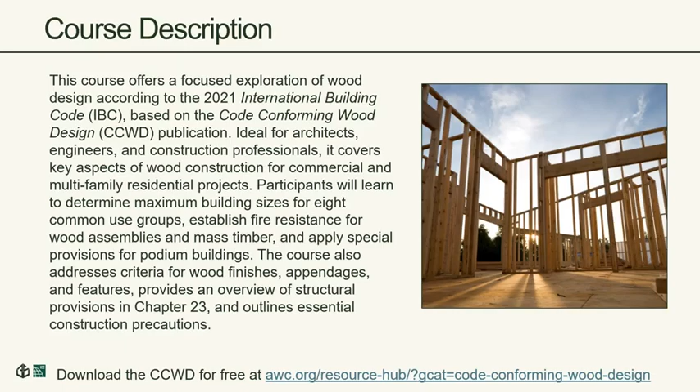Hopefully you've seen the description, and that's why you're here today. So I won't read from the slide or spend a lot of time here on this course description. You'll have that available, hopefully with the handouts that go along with this webinar. But I will spend a little bit of time talking briefly about the learning objectives for today.

We'll also talk a good bit about fire resistance and identify methods that the code establishes for determining fire resistance of wood assemblies and elements. We'll talk about some special provisions like sprinklers and compartmentalization, and then non-structural uses where we apply provisions such as those in the code for finishes and appendages.

So those are some of our learning objectives for the day. The document that we will use as a curriculum, if you will, for this webinar today is called the 2021 Code Conforming Wood Design and the IBC.

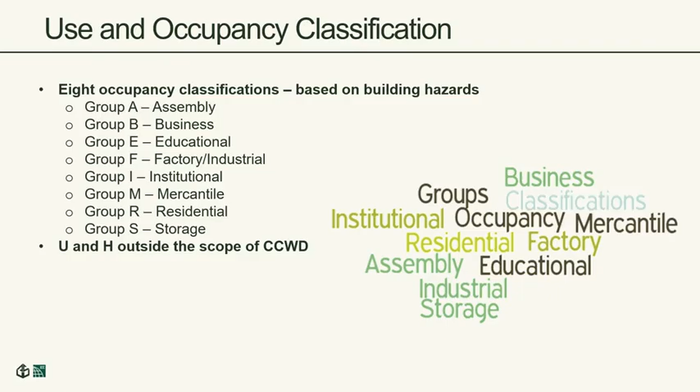And while wood is used in the occupancy classification U and H, since Group U is really for agricultural and less hazardous occupancies, and since Group H is used for much higher hazard occupancies, those are not within the scope of the Code Conforming Wood Design. So we'll be covering the 8 occupancy classifications that you see listed here, and those are the 8 that are also covered in the document known as Code Conforming Wood Design.

So within the building code, and you'll see this within the document as well, Chapter 35 is a very comprehensive listing of all referenced codes and standards. So rather than trying to put effective dates of standards throughout the text of the IBC, you'll simply see a reference to a particular standard. And then Chapter 35 will provide that reference standard along with the standards development organization, identification, the complete identification and title of the standard, and an effective date.

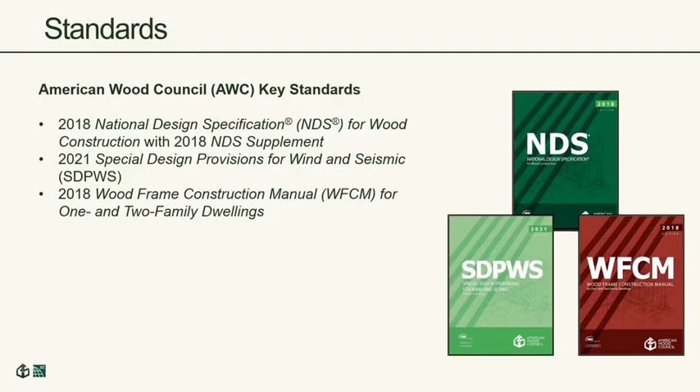And we'll see some of the other key reference standards in the code today, especially as we talk through the Chapter 23 provisions of the code. One of those is the 2021 Special Design Provisions for Wind and Seismic. Another is the 2018 Wood Frame Construction Manual for 1 and 2 family dwellings. And we'll get into a little more detail on all of those as we work our way through the program today. So our next topic is going to be types of construction.

Prior to diving into this topic, it's important for us to distinguish between a couple of code-defined terms in the IBC. One is non-combustible, the other is fire resistant. Fire resistance is defined specifically in 703.2 of the code, while non-combustible is defined in 703.3. These terms are not synonymous and not to be used interchangeably.

They're different concepts. For example, steel and concrete are classified as non-combustible materials, yet there are provisions in the code that require additional fire resistance to be added even for those non-combustible elements. On the other hand, wood is classified as a combustible material, yet it has some inherent fire resistance, and we'll talk about how we can supplement that with additional non-combustible materials to increase the fire resistance of wood used in construction.

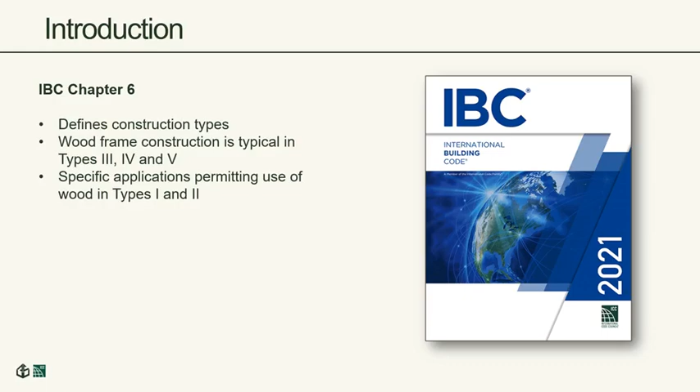Chapter 6 of the IBC defines various construction types. There are 5 different construction types listed in Roman numerals 1 through 5, with subcategories within each. Even in types 1 and 2, which are primarily considered to be built of non-combustible products, there are specific applications permitting the use of wood. We'll look at those in more detail today.

Type 5 construction permits the use of wood or any other approved material in load-bearing and non-load-bearing structural elements. This type 5 construction typically ends up being your smaller height and area buildings. So wood is obviously permitted in types 5A and 5B construction.

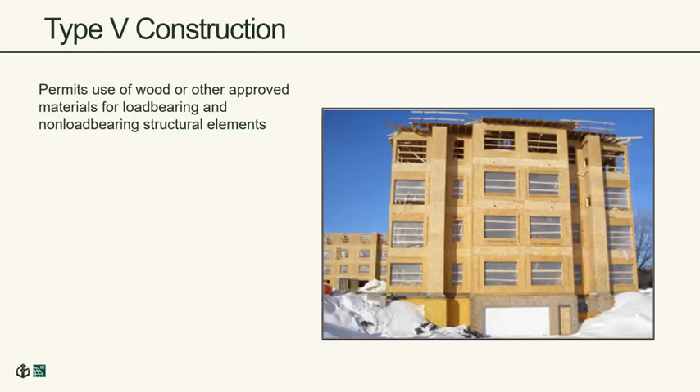We're working our way backwards here in the construction types. Type 4 construction, specifically type 4-HT, is characteristic of what's known as heavy timber construction. Prior to the 2021 codes, heavy timber was all type 4 construction. Now in the 2021 code, we've got 3 new classifications of type 4 construction. Type 4HT is our legacy heavy timber construction type, where the exterior walls are of non-combustible material or fire retardant treated wood, or protected cross-laminated timber (CLT), a relatively new wood product used in mass timber construction.

In type 4HT, the interior building elements can be made of solid or laminated wood. This is our traditional, or legacy, heavy timber type of construction, still permitted in the code, with similar heights and areas as we've always had for this type of construction.

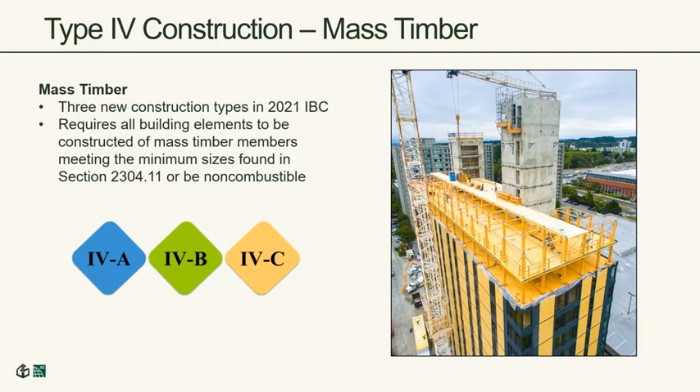Then we get to type 3 construction, which requires either non-combustible or fire retardant treated wood in our exterior bearing walls, needing a 2-hour minimum fire resistance rating. In subgroup 3A, you'll see a requirement for 1-hour fire resistance ratings for building elements other than those non-load bearing walls. In type 3B, we don't require any fire resistance rating other than the exterior bearing walls, which still need that 2-hour fire resistance rating.

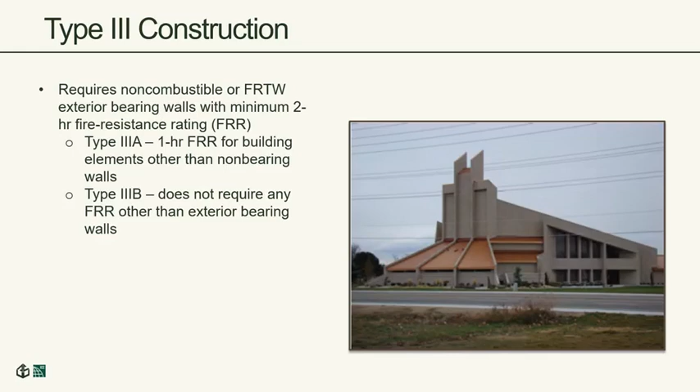Types 1 and 2 construction, as mentioned earlier, are primarily non-combustible structural load-bearing elements, but there are allowances in the code, specifically in Table 601, footnote C, where we can use or specify heavy timber or mass timber in the roof system for types 1B, 2A, and 2B, as an alternative to the 1-hour fire resistance rated non-combustible roof elements. So wood can be used literally in all 5 types of construction.

But the heights and areas will be limited for certain construction types, and we're going to look at that next and see how that applies to these wood products.

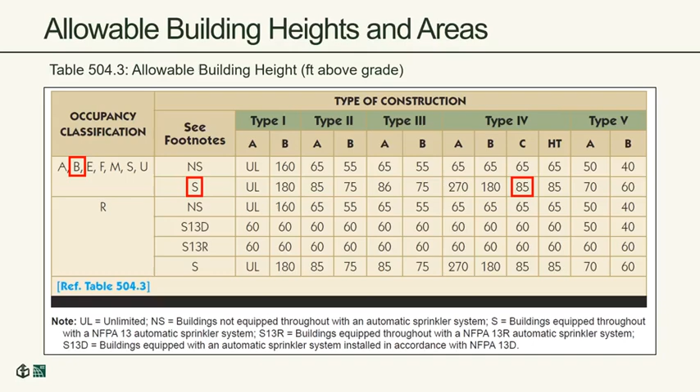Then we get to table 506.2. This is our allowable area factor, A sub T. It's a very specific term, allowable area factor, because this factor or number that we're going to get from the table ends up being used in equations that determine the maximum allowable building areas for the buildings we're talking about. So again, for an occupancy classification B, we're going to look at 2 numbers here for an example we'll do in a little bit.

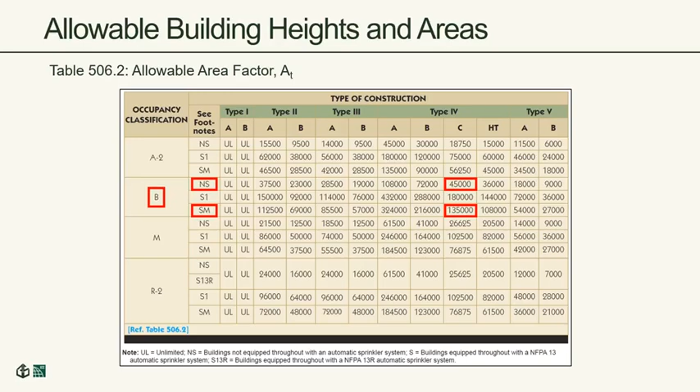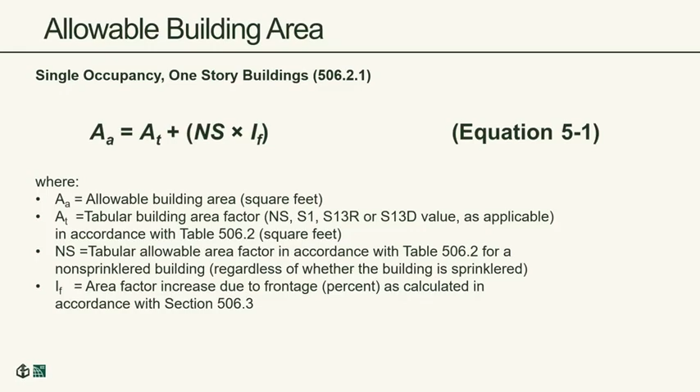That's going to show up in a couple of these equations we're going to be looking at next. The allowable building area for a single occupancy, 1-story building is calculated per equation 5-1 of the code here in chapter 5. The A sub T factor is the tabular building area factor we just looked at in the table. The NS is a non-sprinklered value. We're calculating an allowable building area, A sub A, and introducing a new factor here, I sub F, which is the area factor increase due to frontage, the amount of open perimeter around the building. We'll talk specifically about how we determine that I sub F value in a little bit.

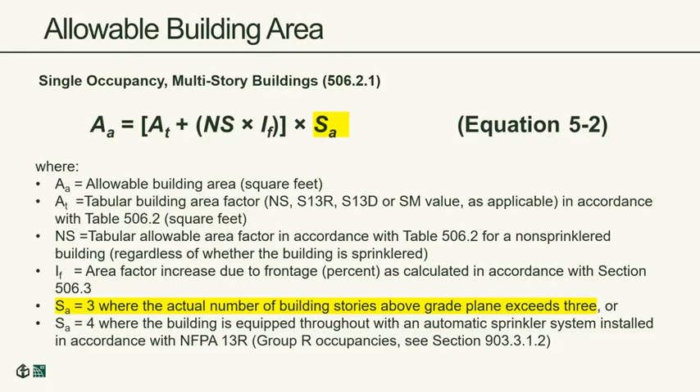For multi-story buildings, single occupancy yet multi-story, we're adding another variable, S sub A. S sub A is the actual number of building stories above grade plane, but it's capped at a maximum value of 3. The example we're going to look at is a 4-story building, but that S sub A value is going to be less than or equal to 3 for all multi-story buildings. There's one exception at the bottom, the last bullet, showing S sub A equal to 4 for certain group R occupancies. But for our purposes today and in general, most calculations will set S sub A at a maximum of 3.

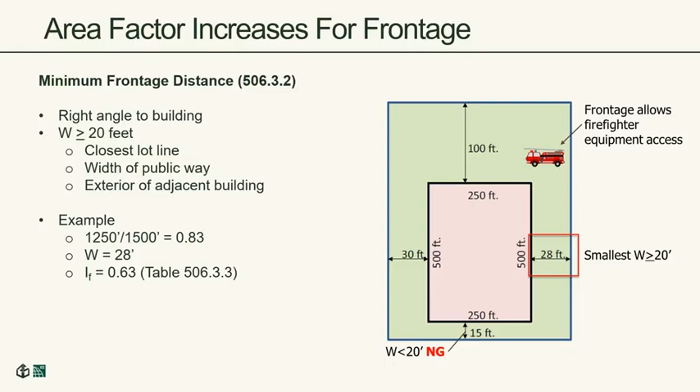You'll see in the next table why we're going to select that value of W equals 28, and we're going to come up with a factor of 0.63. So we're trying to set this up so you see the factors that we would use in this next table.

As we calculated on the last slide, we've got 83% of the sides of this building which have at least 20 feet of open perimeter or setback to the lot line. So we're going to be in this bottom row here between 75 and 100. We work our way across to that W equals 28, and that number ends up between 25 and 30. This simple table gives us an I sub F of 0.63.

Now, interpolation - there's a footnote on this table in the code that says interpolation is permitted, and some of the tables developed for the Code Conforming Wood Design document provide those interpolation values. The calculator that Ed is going to talk about later in the program also provides more exact values than what you can derive from a simple table like this.

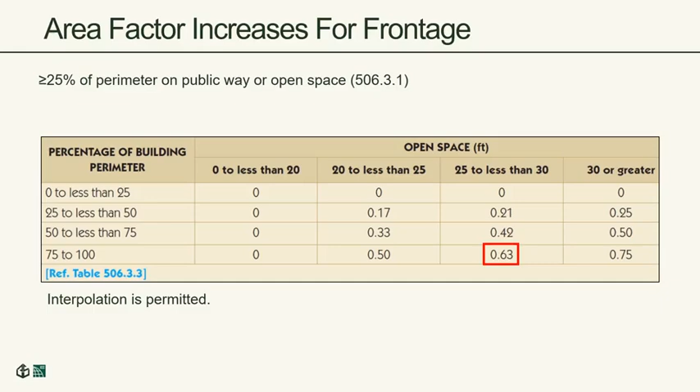So now let's go back and plug all this information into our example. We've got a SM value of 135,000, and an NS value of 45,000. We plug that into our second equation, which accounts for this frontage increase of 0.63 times NS. We end up with a total building area, now that we can account for the area increase for frontage, of 490,050 square feet.

So for the total building of 4 stories, we divide that by 4. Now our allowable area per story goes up to 122,512 square feet, and that gives us our allowable area per story.

However, if we look at our actual dimensions of the building, 250 by 500, that says our actual square footage is 125,000, which exceeds our allowable. So that's no good - NG's no good. We're about 2,500 square feet short in this particular example. We are allowed to interpolate, but even if we sharpen our pencil and interpolate, we still end up about 58 square feet short of our allowable - at 124,942, we're still short. So what can we do?

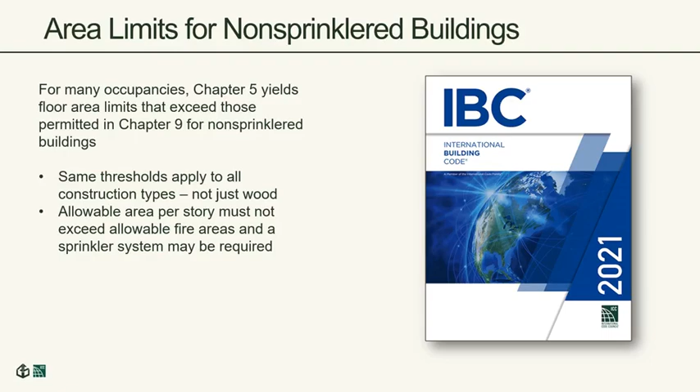In addition to larger areas, there are a lot of other trade-offs that come with adding sprinklers to a building. Yes, it will provide some additional cost, but a lot of these trade-offs may reduce costs in other areas. So it's worth exploring this option of sprinklers to see if you can get reductions in corridor ratings and opening protection, some flexibility in your means of egress, travel distances, number of exits, common path of travel, reductions in dwelling unit separations, alternates to emergency escape openings, alternates to fire and smoke damper requirements, interior finishes we'll talk about later, and others. So sprinklers not only help you in your heights and areas, but some of these other items as well that may help in your process of providing affordability to offset the sprinkler costs.

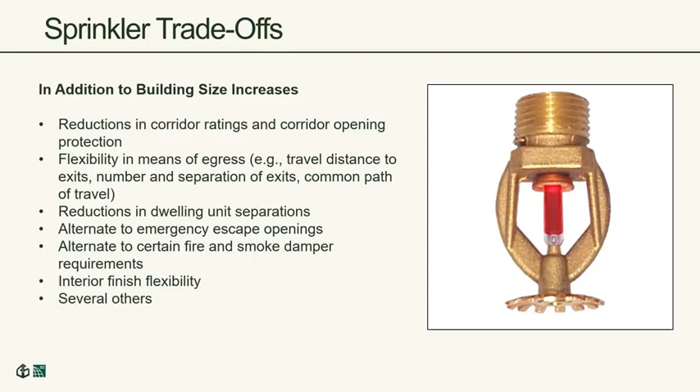Now we'll get in specifically into the code conforming wood design building area tables. So just an intro to what these tables are going to look like and what you're going to see. We'll spend a little more time on this particular slide.

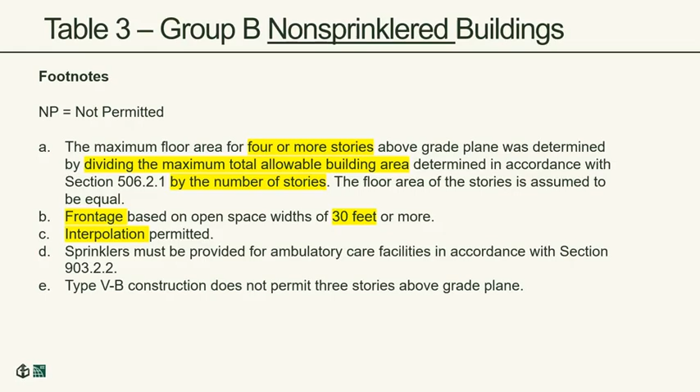So that first table, table 3, is for a non-sprinklered Group B. Then you'll see table 4, which is for sprinklered buildings, and in this case, the areas increase pretty substantially for sprinklered buildings. The number of stories, as you can see here, goes up, at least on this slide, up to 6 stories.

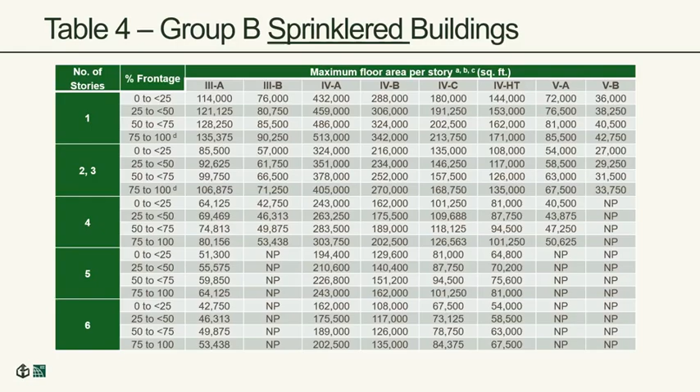But I'm going to jump to the next page, because new to the 2021 IBC, types 4A, 4B, and 4C allow us to go even beyond those 6 stories that were allowed for type 4HT. So 4A construction goes all the way up to 18 stories, 4B goes up to 12 stories, and 4C goes up to 9 stories, as we saw in some earlier slides. We've tabulated these allowable maximum floor areas per story for all these new types of construction here.

So that's a sense of the table 4 footnotes, very similar to the first 3 footnotes, and then you'll get a few footnotes very specific to Group B sprinklered buildings.

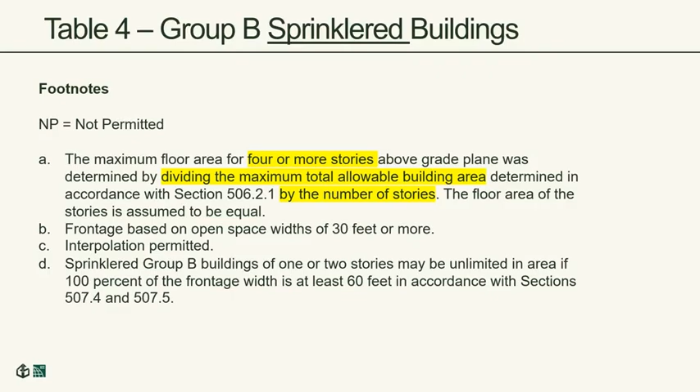Now, back to our example that we used earlier, we had a 4-story type 4C building, and because of these percentage frontage numbers here in the second column going in increments of 25%, it makes it a little bit tougher for us to compare apples to apples. But for this specific example, because we only have 2 sides of the building that exceed that 30-foot threshold that is in the footnotes we're using for these tables, that kind of limits how we can come up with a number here.

And so this number, 118,125, is still less than that 125,000 that we looked at earlier—and substantially so, again, because of some of the simplifications we've had to do for these tables. So just know there's some conservatism, some simplification as you're using these tables that may give you a starting point for your height and area analysis.

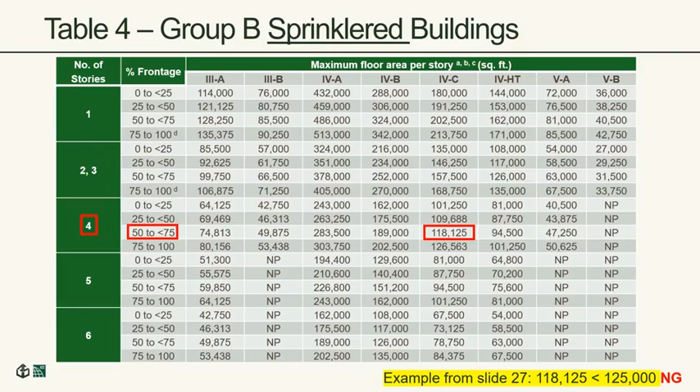And then, if you're not within or not quite where you need to be, you might need to sharpen your pencil and actually go use the equations, do some calculations, or use the calculator that Ed's going to show you here in just a little bit.

So there are also provisions in the code for unlimited area buildings, and we'll just walk briefly through some provisions in section 507 of the code for groups B, F, M, and S: 1-story buildings with NFPA 13 sprinklers and 60 feet of open perimeter around the entire building. We could have an unlimited area building.

So we go to even a group E occupancy, 1-story, fully sprinklered—as long as the classrooms have 2 means of egress, one to the outside, and we've got that 60 feet of open perimeter, we could have an unlimited area education building in type 3A or 4 construction. So we're focusing in on different types of wood construction here that could be used for these groups.

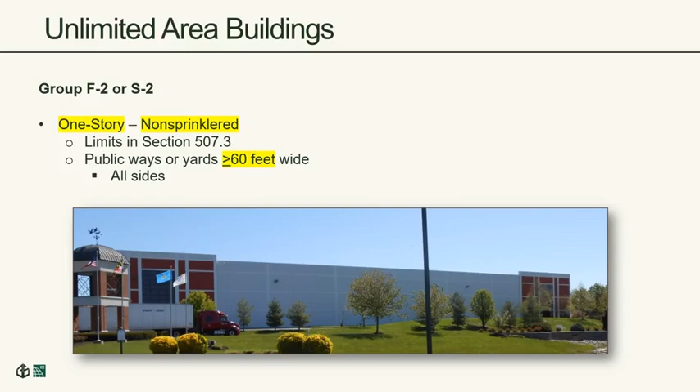Here's an interesting one: group F2 or S2, 1-story, non-sprinklered. As long as you've got at least 60 feet of open perimeter, F2 and S2 buildings have lower hazard combustibles or non-combustibles used in these groups, so even a non-sprinklered building within these parameters could be unlimited area. The difference in this slide is a 2-story B, F, M, or S, fully sprinklered, with at least 60 feet of open perimeter, can also be unlimited in area. So those are our unlimited area provisions.

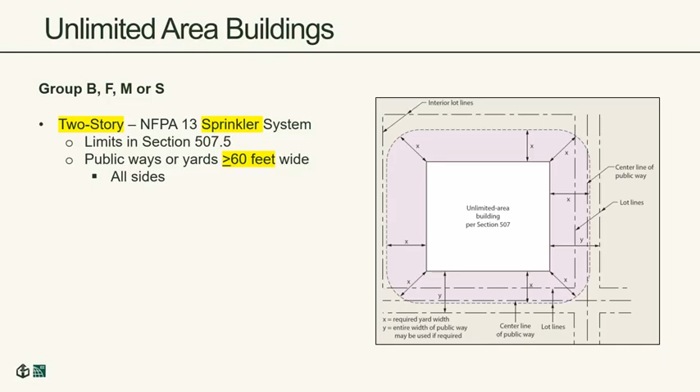Firewalls can be used to define separate buildings for allowable building size. Section 706, specifically table 706.4, provides for firewalls, and these are separate and distinct from fire barriers, fire partitions, and other types of assemblies that the code provides.

Podium buildings are pretty common all over the country. They're covered in section 510 of the code. You've also probably heard the terms pedestal building or stack building. These are buildings with a 3-hour fire resistance rated horizontal assembly between upper and lower buildings.

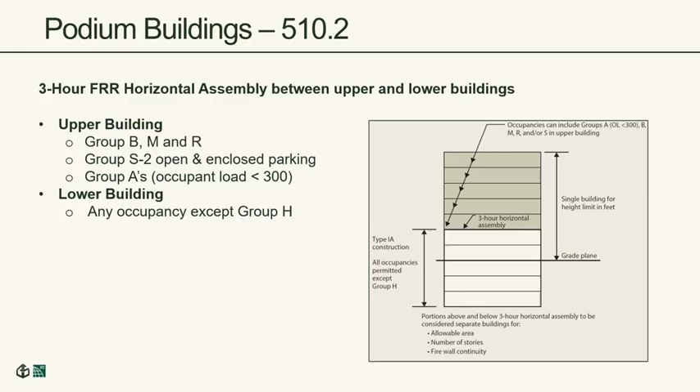The upper building can be groups B, M, R, S2 open and enclosed parking, and group A with an occupant load less than 300. The lower building can be any occupancy except group H, and that lower building will be type 1A construction. So these types of buildings are ubiquitous.

We have provisions in 510.2 of the code that talk about how we determine the building height in feet, which is measured from the grade plane. On the right side of this image, we're measuring height in feet from the grade plane, whereas we can measure number of stories from the top of the podium or pedestal, so you could get a few more additional stories into that upper occupancy group with this approach.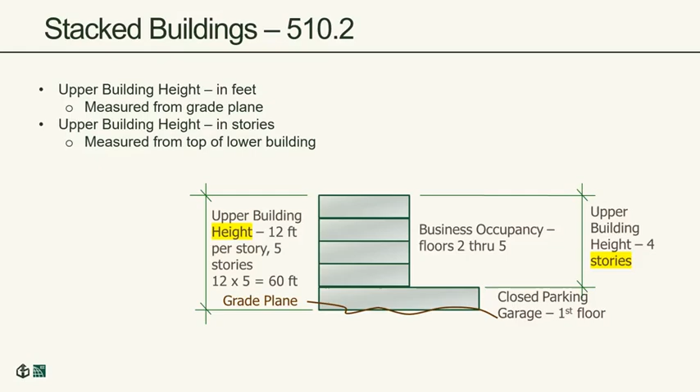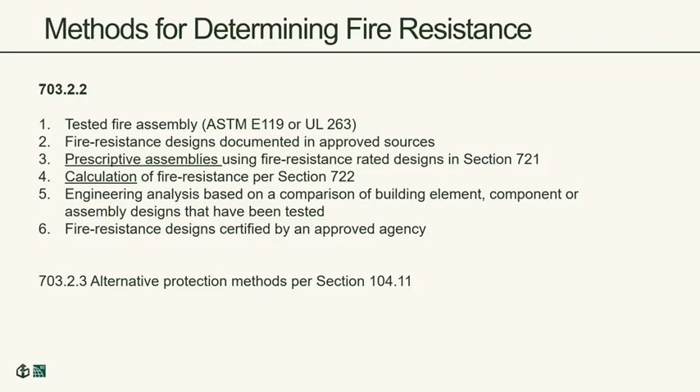In 703.2.2 of the code, there are different methods for determining fire resistance. We're going to look at two of those: prescriptive assemblies and a calculation approach. Most all of these approaches have a basis in ASTM E119 testing or the UL equivalent, UL 263. For prescriptive assemblies, there's a whole section of the code that lays out different types of assemblies, not just wood but all types, both vertical and horizontal, that if built to the exact specifications laid out in those tables, have the fire resistance rating as shown.

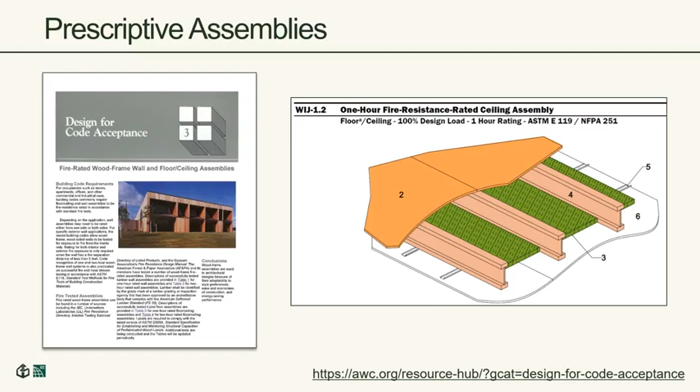For wood assemblies, AWC has a document called Design for Code Acceptance number 3 that provides the assembly ratings for both horizontal and vertical assemblies, and a lot of these have made their way into the code and match up identically with what's shown in this DCA3 document. You can see the link, and that's a free download from AWC's website as well.

The other method we mentioned is the calculated approach, and NDS Chapter 16 is referenced specifically in the code as the way to calculate fire resistance of exposed wood members. Now there's part of the approach that allows additional protection, non-combustible protection, to be additive to that calculated fire resistance rating for an exposed wood member. That's spelled out specifically in NDS Chapter 16.

We mentioned wood and non-combustible construction a couple of times in Type 1 and 2 applications, which requires non-combustible materials. Section 603 of the code has 27 specific applications where combustible materials can be used.

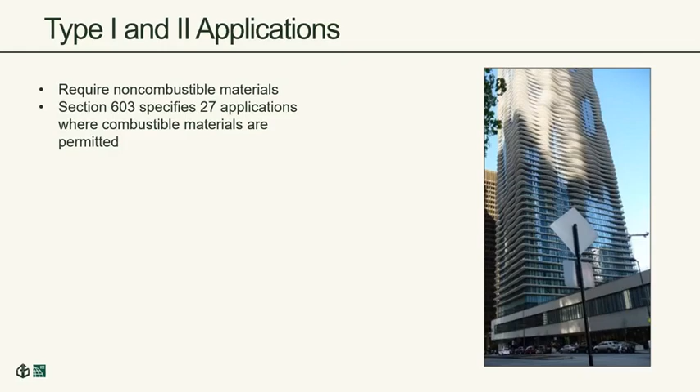One of those is fire retardant treated wood, which is still considered a combustible product. But there are a lot of areas in that list of 27 where fire retardant treated wood can be used, including non-bearing partitions, non-bearing exterior walls, roof construction, balconies, porches, decks, and exterior walls in type 3 and 4.

Heavy timber is also permitted in roof construction as an alternate to the 1-hour fire resistance rated non-combustible construction, which we talked about earlier, and that shows up in footnote C of table 601.

So building features really looks at interior finishes and some other items that we'll touch on here as we get a little closer to the end of our discussion.

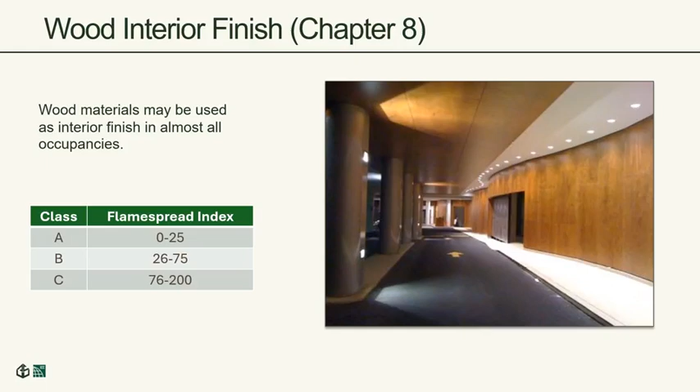Interior finish is determined or characterized by these flame spread indices: Class A materials 0 to 25, Class B between 26 and 75, Class C up to 200. And this table in Chapter 8 of the Code, 803.13, shows where those classifications are required depending on the use group and whether the building is sprinklered or non-sprinklered.

So here's another example of where sprinklers give you a benefit and would allow you to use a lower classified finish rating or flame spread rating for some of these wood materials. That's another one of the benefits that we talked about earlier.

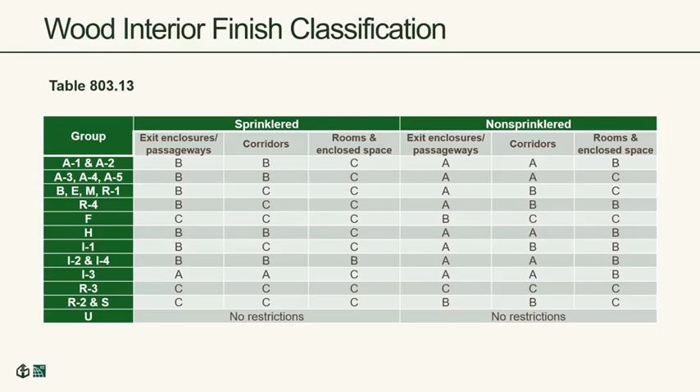Now, if you're trying to figure out what the flame spread index is for a certain wood product, AWC has a publication called Design for Code Acceptance number 1, and most wood species are going to qualify at least as Class C, some Class B. Most of your Class A products are going to have some sort of fire retardant treatment associated with them. But you can download this document, a compendium that they keep up to date with the flame spread ratings for different wood products.

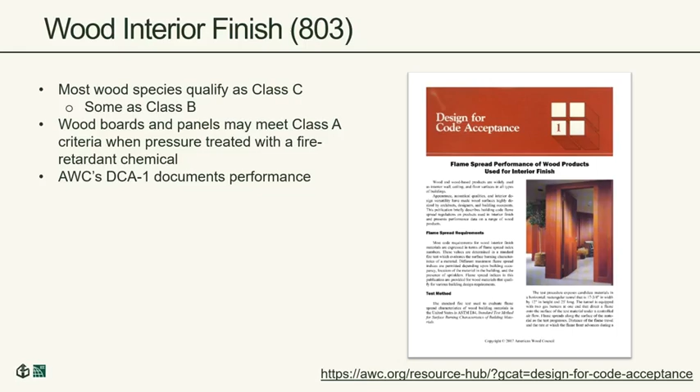Now, also in Chapter 8 are some exceptions where wood can be used. Traditional wood floor coverings, like a hardwood floor, are exempt from those finish ratings, as are mass timber elements. So any type 4 structural elements, except for exits and egress areas, are exempt from those interior finish and flame spread requirements. Those exemptions exist for all type 4 construction.

When we start talking about cornices, eaves, overhangs, exterior balconies, and other types of projections, the code is going to have some limits on distances of those projections to the lot line. 2 feet is pretty much the minimum, and once you get up to or exceed 5 feet, then a lot of those restrictions go away. So there's a table in the code, and this kind of summarizes graphically what some of those limitations are going to be for wood projections.

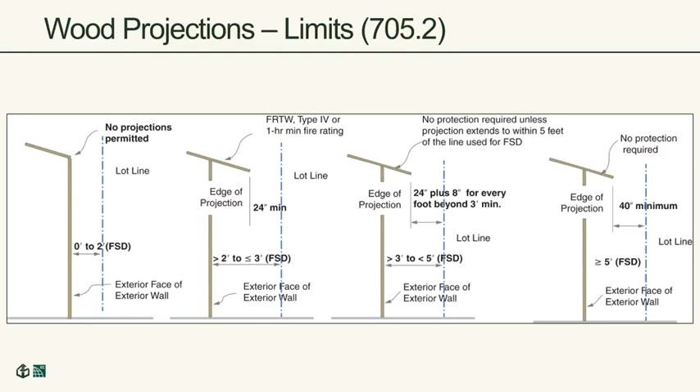We've also got definitions in the code for what are called naturally durable wood species. You see that definition here for heartwood of redwood, cedar, black locust, black walnut, that can be used in certain locations subject to decay.

If you're not specifying one of those naturally durable species, then some sort of preservative treated, waterborne preservative would be needed.

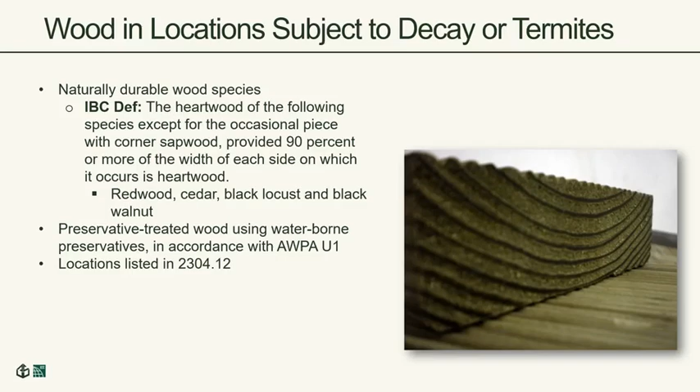All right, now we're into Chapter 23, some of our structural provisions. Chapter 23 is going to list minimum standards for quality and design considerations, general construction requirements, conventional light frame construction. There are 5 different compliance paths.

You'll see allowable stress design (ASD), load and resistance factor design (LRFD), conventional light frame construction in section 2308 of the code, the wood frame construction manual specifically referenced in section 2309 of the code, and there's an ICC standard 400 for log structures.

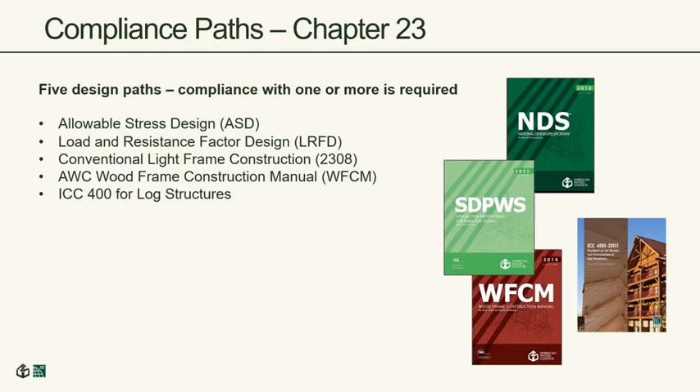So this list in 2303 is really sort of a summary of the various subsections for the different wood products and a code path for those wood products and their connections. Most of these are going to reference some sort of manufacturing or design standard, and that's a code path that's pretty important for all of these wood products that you'd specify.

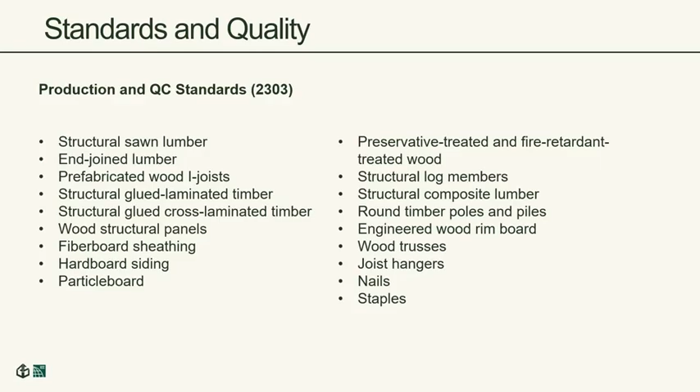Also in Chapter 23 is a description of where performance versus prescriptive requirements apply. You'll see an overview in section 2304 that will give you a path for the conventional light frame construction provisions in section 2308. Outside of those prescriptive limits, design or engineering would be required.

Here's a table dealing with exterior wall sheathing in 2304.6 and different wood structural panel products. If they have a certain panel nail spacing, you see the different wind speeds and exposure categories. These wind pressures are going to be based on your component and cladding wind loads, or wind pressures, per ASCE 7. So an example here of where these products can be used prescriptively in the code.

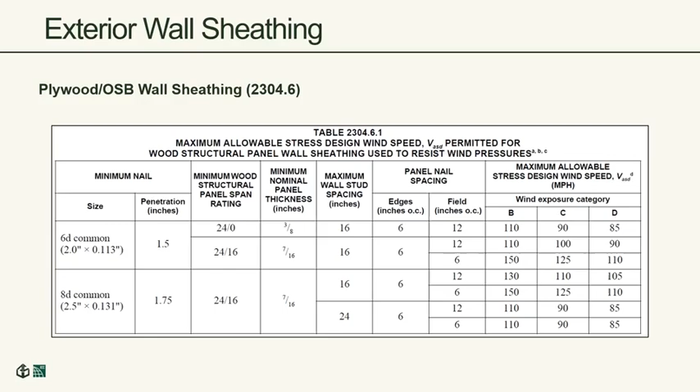Lumber decking, up until the 2018 code, prescriptively required 20 penny common nails to fasten lumber decking. With newer power-driven fasteners available in the market and the resurgence of nail laminated timber now used in mass timber construction, this table was added to allow for smaller diameter fasteners than the 20D commons you see.

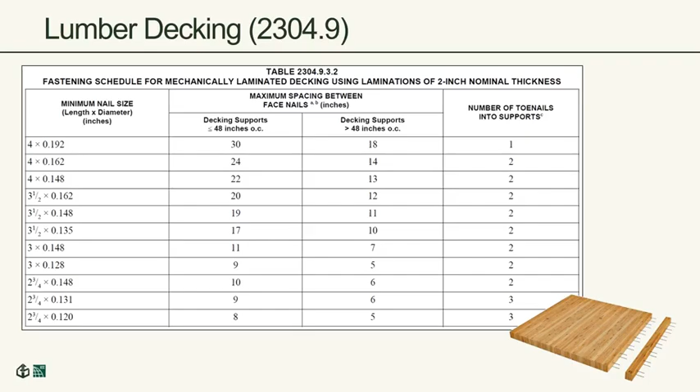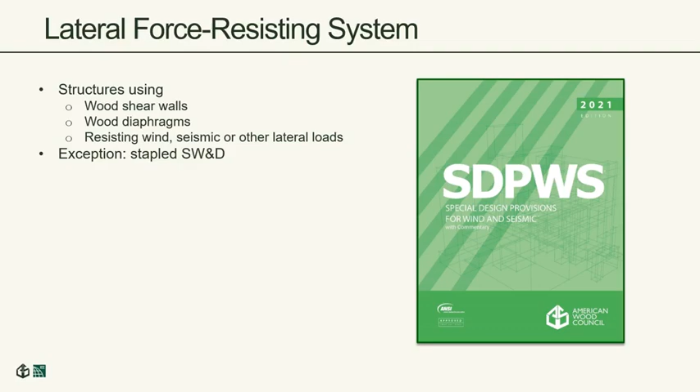For lateral force resisting systems, we're going to reference the wind and seismic standard, special design provisions for wind and seismic for shear walls, diaphragms. The stapled shear walls and diaphragms actually are still contained in the IBC, so you'd go to the IBC for that type of information. For allowable stress design and load and resistance factor design, the NDS and the wind and seismic standard are dual format standards, so you're going to get both allowable stress design and LRFD in these two reference standards.

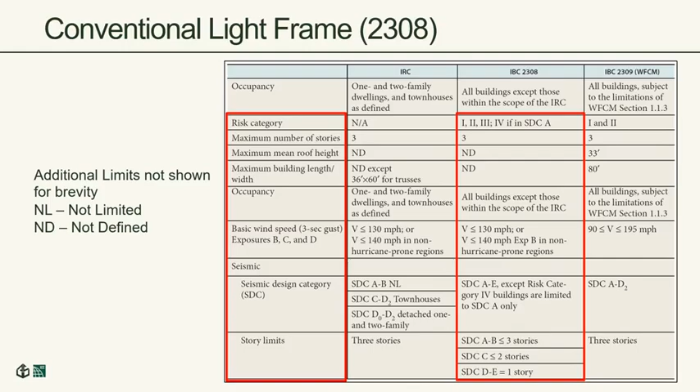When we get to 2308, this is our conventional light frame construction provisions. This table gives you a comparison of IRC, or International Residential Code, versus IBC 2308 conventional construction provisions and 2309, which references the wood frame construction manual. This might give you a better sense of the limitations and the application for these specific codes and standards, so won't spend a lot of time going through those here. Hopefully you've got these handouts that you can take a look at to help you determine where your building might fall within one of these three categories, or what options you might have available, for example with the wood frame construction manual that you may not have realized existed. The wood frame construction manual can be used for non-IRC buildings, for risk category 1 and 2 buildings only, and it's typically going to be a single story application, but for some common commercial retail buildings like restaurants and office buildings, you can determine your lateral design for wind and seismic, your gravity load path, using this wood frame construction manual.

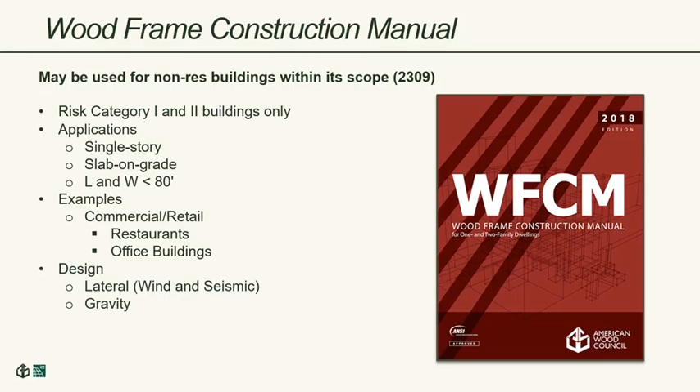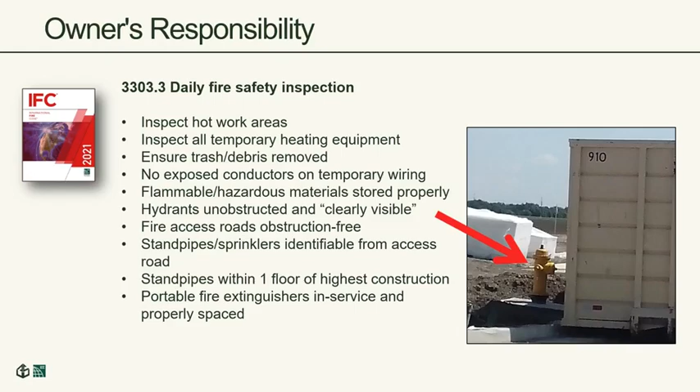One of the things you'll see, and this applies beyond wood construction, but anytime combustibles are on the job site, the fire code in chapter 33 is going to require a daily fire safety inspection. That's looking at hot work areas, temporary heating equipment, debris and trash removal, temporary wiring, flammable and hazardous materials. The example shown here on the slide is making sure the fire hydrants are unobstructed and clearly visible. There's a whole checklist of items that are going to be required for this daily fire safety inspection. I think we're getting close to the end here. We're going to talk a little bit about energy and acoustical and then turn it over to Ed.

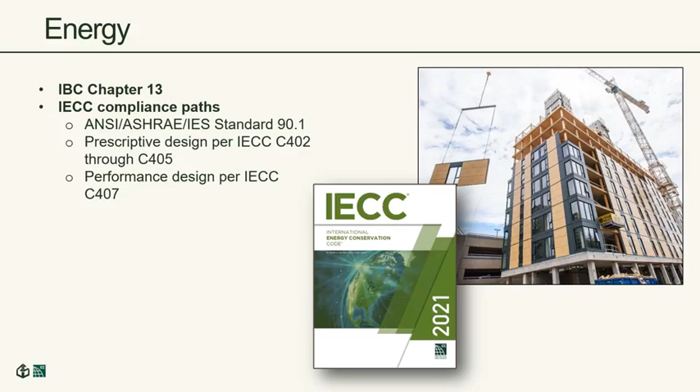Chapter 13 of the building code requires, or provides, several different compliance paths for your energy design. One's the ASHRAE 90.1 standard. Another is the prescriptive design provisions for commercial buildings. The other is performance design. All of these are per the International Energy Conservation Code. The advantage that mass timber and log structures have in this process is that those can be designed as mass elements, which gives you an advantage with your U-factor approach in energy calculations. Then for acoustics, we're looking at chapter 12. STC ratings and IIC ratings are spelled out there, especially for multifamily buildings or student housing, dormitories, that type of thing.

In DCA 3, which we talked about earlier, a compendium of fire resistance rated assemblies, there are also STC and IIC ratings for those assemblies if those have been tested and are available. AWC has also developed Technical Report 15 for calculation of sound transmission parameters for wood frame assemblies, along with an accompanying calculator. All of these are free documents that can be downloaded from the AWC website.

So I'm going to end there and turn it over to Ed, and he's going to walk you through the heights and areas calculator that's been jointly developed by AWC and ICC.

My name's Ed Lisinski, and I'm the Midwest Regional Manager for the American Wood Council. To wrap us up today, I will present a virtual tour of the newly updated height and area calculator that you can find on our website.

The calculator was just updated for the 2021 IBC in correlation with the 2021 Code Conforming Wood Design Guide that Buddy just covered. So we'll start on the website here, which is awc.org.

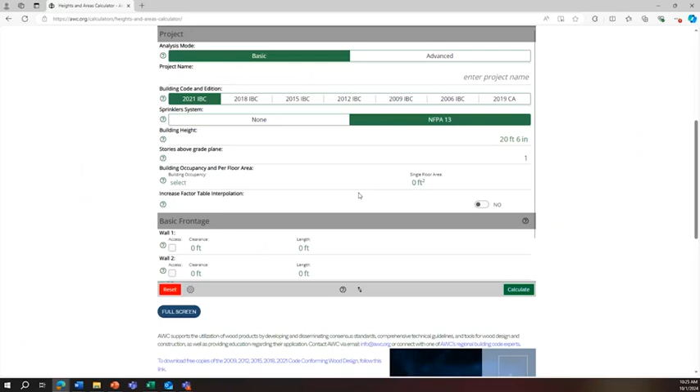Just to give you a brief overview, you'll see some basic information here that you'll type in about your project itself - you'll type in the frontage and the wall sizes. You can reset and clear everything out, and you can hit calculate once you're ready.

There is a question mark here that will provide you some information about the calculator itself. As you scroll down towards the bottom, there's some information on the 2021 Code Conforming Wood Design Guide that Buddy just covered. You can also go into full screen mode, and I will do that right now just to show you what that looks like.

So here is the calculator in full screen mode, a little bit easier to see, and you don't have to scroll as much. As you go through the side here, you'll see a whole bunch of question marks. Anytime that you see one of these, if you click on them, it will give you some information.

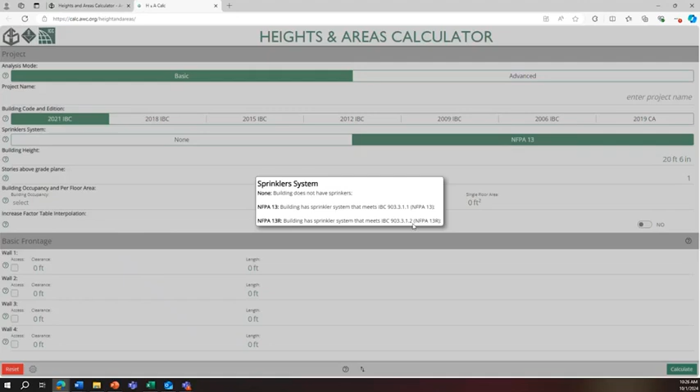Let me click on the sprinkler system one just to show you what that looks like. A little text box will pop up. If you select none, you will see the building does not have any sprinklers. NFPA 13 meets IBC 903.3.1.1, NFPA 13R meets 903.3.1.2, and so on. You can click on that question mark again and get rid of that text box.

You may just, as I clicked on that, say, yeah, NFPA 13R showed up in the question mark, but I don't see it here as an option. Well, I'll get into that in just a second as to how that option shows up. So starting off at the top of the calculator here, we have the basic program, and then we have an advanced program.

I'm going to walk through the basic program for you, but then I'll also show you some of the stuff in the advanced, though I won't actually work a problem through the advanced option. You can type in your project name if you're interested.

We'll call this one Lisinski Towers, named after myself. You can select the building code version you're on of the IBC, and you'll notice that we have it from the 2021 IBC down to the 2006 IBC.

We also have the 2019 California Building Code as an option. For sprinkler systems, like we talked about, you have none, you have NFPA 13 right now, and you can also get 13R on there as well.

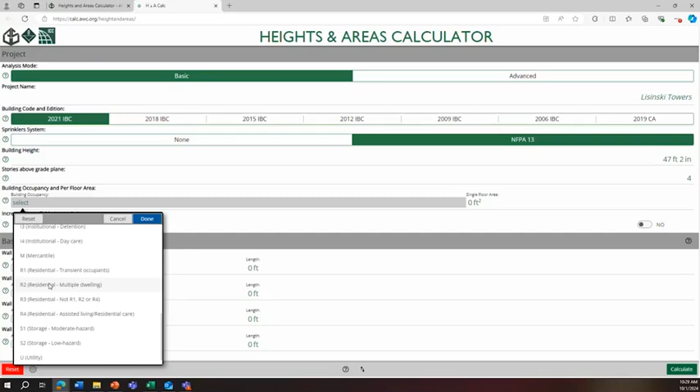The example that Buddy went through was a B occupancy, but let me just click on R2 to show you that when I select that as an occupancy type, you'll notice now up above here that NFPA 13R does pop up as an option for you.

If I click on R3 occupancy, now NFPA 13D also shows up as an option for you. But again, we want to go with a business occupancy, and it is sprinklered.

The floor area that we went through on that example was 125,000 square feet, and I just typed that in on my keyboard.

You'll notice the next question is whether or not you want to permit interpolation for the increase factor in the increase factor table. If you click on that question mark - and I know Buddy went over this a little bit - footnote A does permit interpolation. However, certain jurisdictions may not permit this.

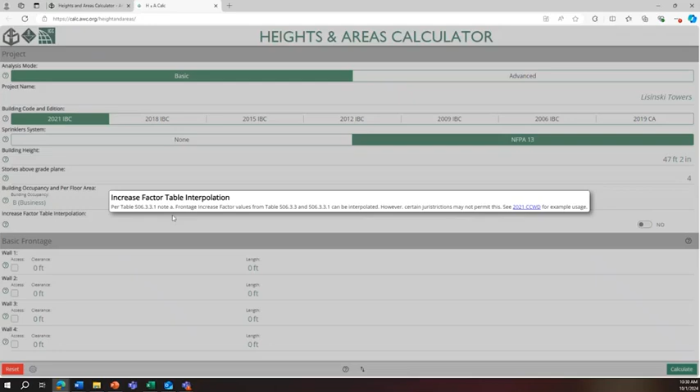I know that there are some jurisdictions, some states out there, who have adopted the 21 code and have actually taken out that interpolation button. So we've given you an easy toggle here to turn that on or off if you want to interpolate or not. We'll just leave it off for now because that's how Buddy went through his example.

So let me slide that back out of the way. In the basic option, you're just permitted the 4 walls - this is for basic buildings, again, 1 occupancy throughout the entire building. But we'll start to type in that information.

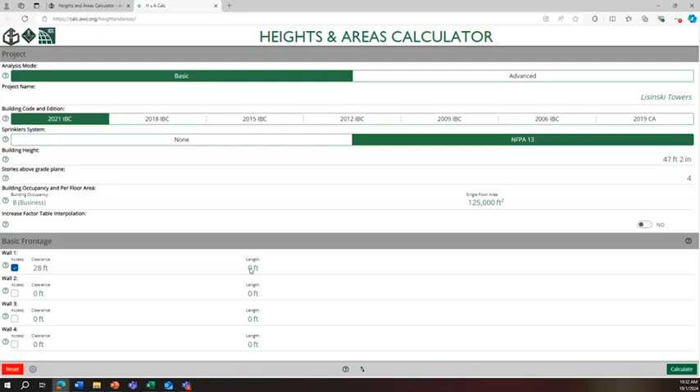So again, we have access, a clearance of 28 feet, and I'm just typing this in on my keyboard, but you can certainly do it on the screen as well. The length of that wall was 500 feet. Wall number 2 in the back had a clearance of 100 feet, and that building length was 250 feet.

Wall 3 had a clearance of 30 feet and a length of 500 feet. Wall 4 did not have access - it had a clearance of 15 feet and again a length of 250 feet.

So again, once you get through with this, you can hit reset and it's going to wipe everything out, or you can hit calculate. Hopefully you're going to hit calculate.

The top of this calculator is going to give you all the information that you typed in. So again, we're in basic analysis mode. You've got the project name, the code that you're in, the sprinklers, your building height, your number of stories, your occupancy, your floor area, and each of those different frontages.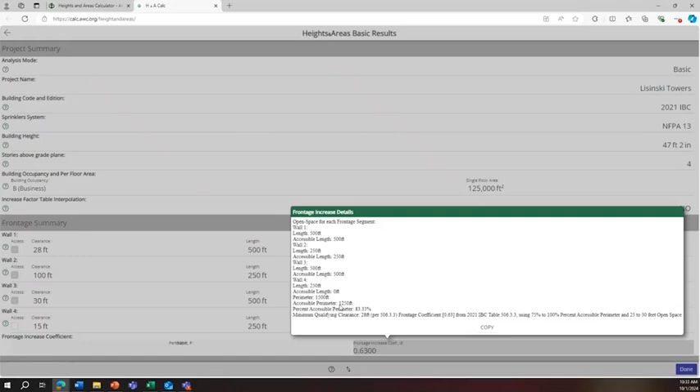Now down here, it's going to give you that frontage increase that you'll see down here. One other cool thing about this, if you click on that button, or if you click on that 0.63, it's going to give you how it came up with that information, the calculations on how that was all determined. So all that information is provided in there. Click on it again, and that text box goes away.

I'll come over here to Buddy's slide again, and you'll notice that he came up with an increase factor of 0.63 as well. And so that's what we have.

Now, if you scroll down here towards the bottom, it's going to give you your construction types that you can build with and meet each of these, meet that building size and height. So you'll see what options we have here is type 1A construction, 1B, 4A, and 4B. Now, Buddy was trying to get to 4C construction, and much like in his example, that was not permitted.

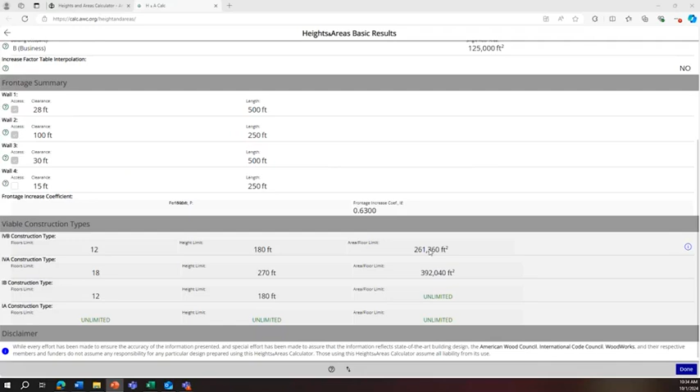I'll also mention here under the area/floor limit, if you click on that, again, it gives you the calculations and how that number was derived based off the calculations in the code. So this did not make it for type 4C.

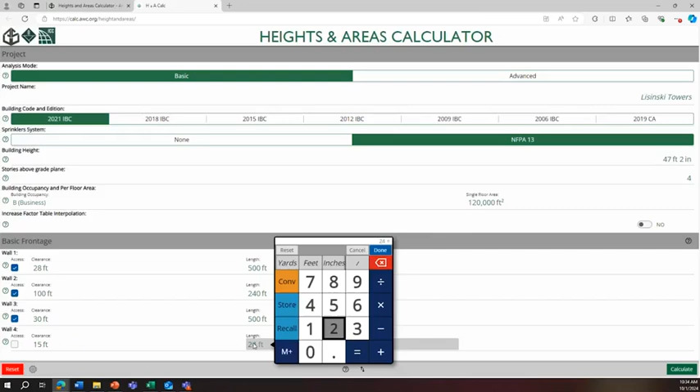You can actually hit the done button here, and it's going to take you right back to those same inputs that you had earlier. So now if we wanted to try to change this to 120,000 square feet and shrink these sides down to 240 and 240, we can recalculate that.

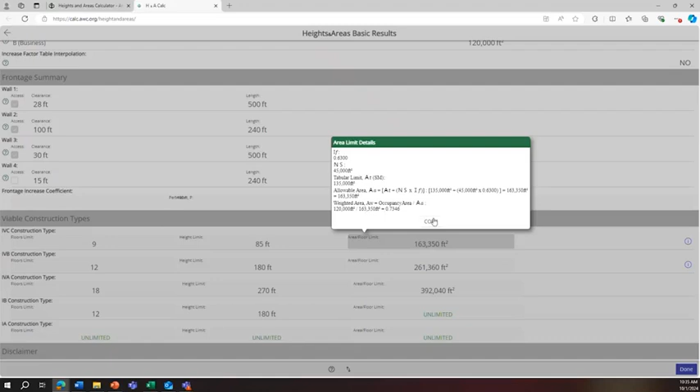And if we scroll down now, we see that 4C construction is permitted, and that weighted occupancy of 120,000 square feet per floor is about 73% of the 163,000 square feet that would be permitted, with that frontage increase and everything else added in. So if we shrink that down a little bit, we can get to a 4C construction.

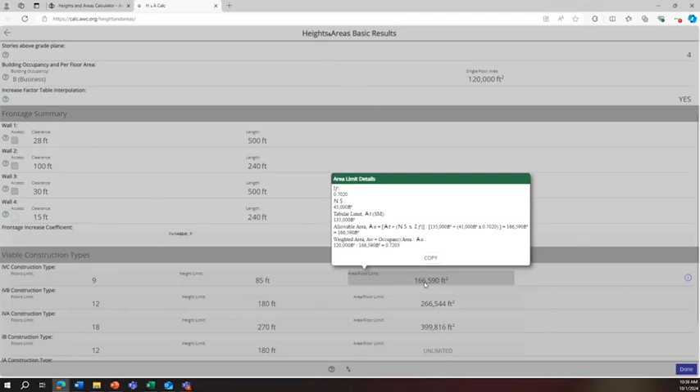I'll also let's see what happens if we allow interpolation. Let me just hit that calculate button again. And now you'll see that the frontage increase actually goes up to 0.7020. Again, if you click on that, it's going to give you all the math on how that number was derived. And now you'll see that the 4C construction actually went up to 166,590 square feet. So a little bit more on that frontage increase.

All right, let me back out of this. And just briefly, I want to show you the advanced option as well. So if I click on advanced, it's going to wipe out everything from basic. If you go back over there, it is still there though. So you can kind of do these simultaneously.

But in the advanced, again, you've got something similar here where you can do the code option up here at the top. It then lets you select the type of construction that you have. So again, we want to do this as a 4C. Sprinklers are in there again. Our height and stories translated over from that previous one.

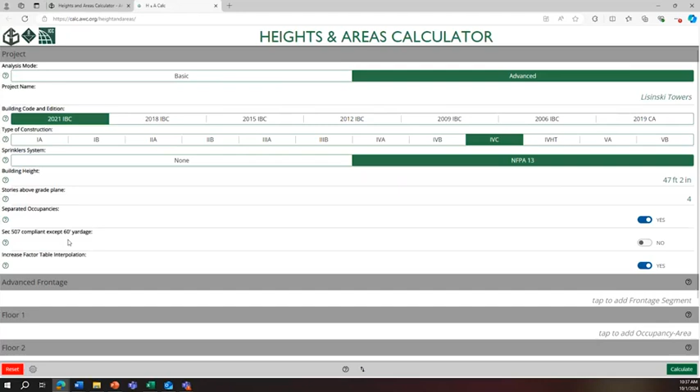Here we can talk about separated occupancies if you wish, so maybe we have more than one occupancy per floor. You can also select if you're Section 507 compliant, with the exception of the 60-foot yardage, and that gets into some of those unlimited area options that you may have.

And then again, the increase factor interpolation. Now again, we've got 4 stories on here. Just kind of clicking on that again. You'll notice down here then the inputs for the walls and the floors are quite different.

So here we have advanced frontage, so we can tap on that and add a frontage segment. You can add as many walls as you want here. If you have a building with 15 exterior walls, maybe it's a weird shape, and each one of those walls has different frontage or different fire separation distance, you can type that all in.

Let me just go through a little bit on Buddy's example before, though, just so we can have this. So we've got length of 500 feet. It will talk about the clearance that you have at the start over here, and then clearance that you have at the end. At the start, we had 28 feet, and at the back, we had 28 feet. So we'll leave that wall just exactly as it was in that example, but let's add another segment here. We've got 250-foot length.

We had access in the front of 100 feet, but maybe by the time we get towards the back, we still have access, but maybe that's cut down to 27 feet because that property line runs at an angle in the back.

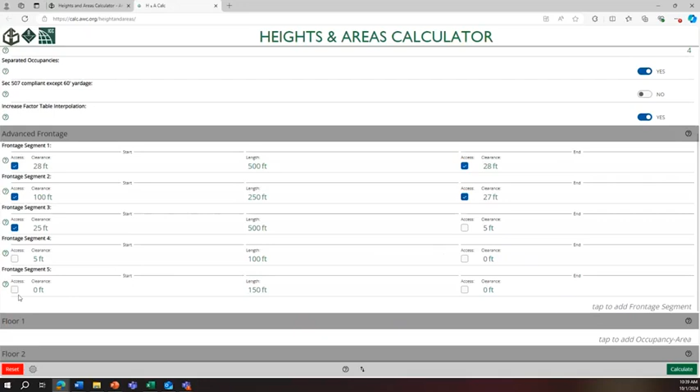So now we also have another 150-foot section that is at the property line, right? We have 0 clearance on that from the start to the back. And again, you could add as many wall sections as you like. It's really just counting the walls that are perpendicular to the property lines or another building on the same lot or the road or public way, looking at that fire separation distance on those.

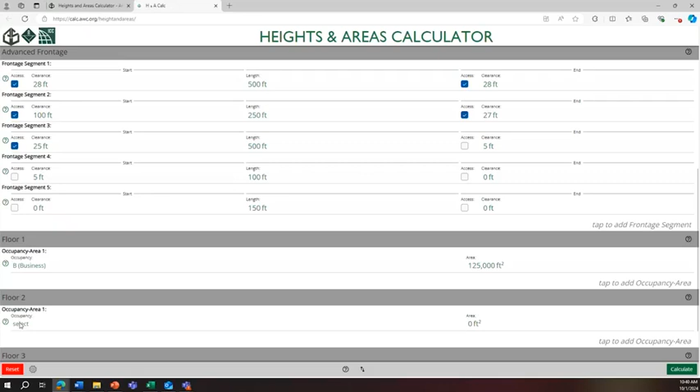We can then go into the different floors and add different occupancies. So maybe floor number 1 is a B, and that's 125,000 square feet on that first floor area. But on floor number 2, now maybe that is multifamily up above, taking up 100,000 square feet, and there's also a performing arts center there that takes up 25,000 square feet. You can see how you can start to really build this out on each of the different floors.

Let me put something in here, I'm just going to make up some numbers. So we'll put in business up here, also at 125,000 square feet. And then floor number 4, let's throw in low hazard storage up top at 125,000 square feet.

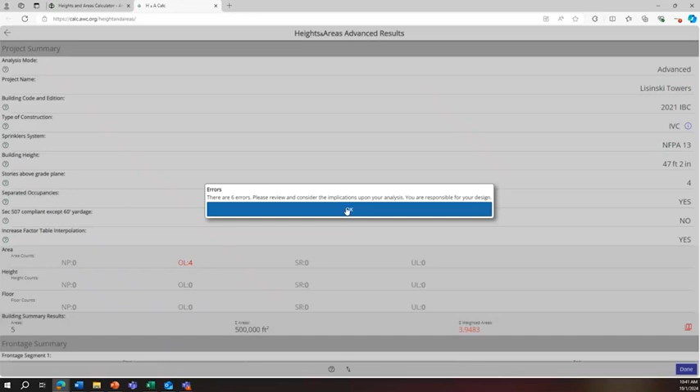All right, and just hit calculate on that just to show you guys what this looks like in the advanced version. Now it's going to tell you that construction types 1A, 1B, 4A, and 4B may be viable for the current options here. It's also going to pop up that there's some errors here, and I didn't try this out, so that's not surprising to me. But I just wanted to show you again, the frontage increase is still in here, still gives you all that information.

You'll see things that are in red, and that's going to give you the errors. So if you click on that, you can see that. What did I have in there? You're only allowed 87,170 square feet for whichever occupancy I put on that first floor. Oh, the R2, after you put in the averages, weighted averages, and everything.

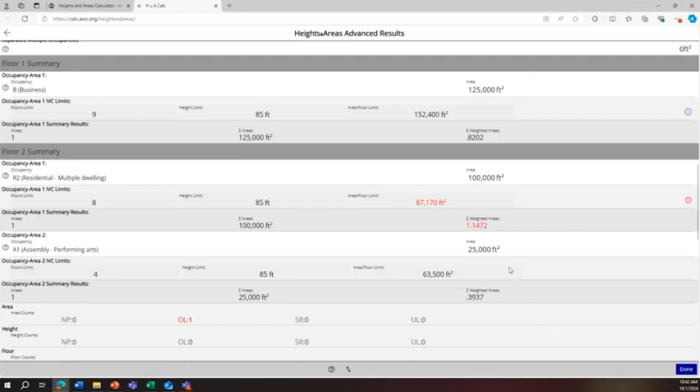So we had I put in 100,000 square feet. I'm only permitted to have 87,000 square feet. So I'm 14% over what I'm permitted on that floor. So I just wanted to kind of break it to show you what that looks like if you put something in there that's wrong.

And again, you can kind of see a few other red marks in there, and each one of those you can click on. You'll see some of them are flashing here. Again, you can click on that flashing red exclamation point and see that this is over the 87,000 square foot area limit for R2 residential.

And some of these are in blue, you'll notice some blue exclamation points. Those are just warnings saying that on this particular floor, floor 1, the B occupancy area is not over the area limit because the building has sprinklers in it. So it gives you a few warnings. And again, if you see something flashing in red, that means you can't build your building that way, something is wrong. So again, a lot more options here in the advanced one.

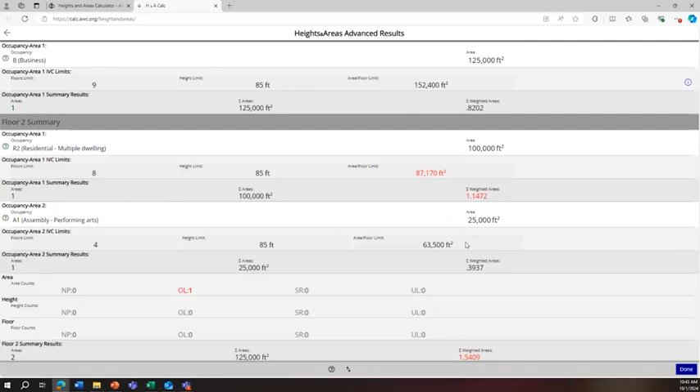It does get a little bit more complicated on the summaries here at the end. But again, you can do multiple occupancies per floor, separated occupancies, non-separated occupancies, and as many different floors as you'd like. And if you run into something like that, you can hit the done button, and that's just going to take you back to the beginning here, and you can adjust some of your numbers and try to come up with something a little bit better.

So that's the height and area calculator, again the basic version and the advanced version. And with that, I think that kind of wraps this up.